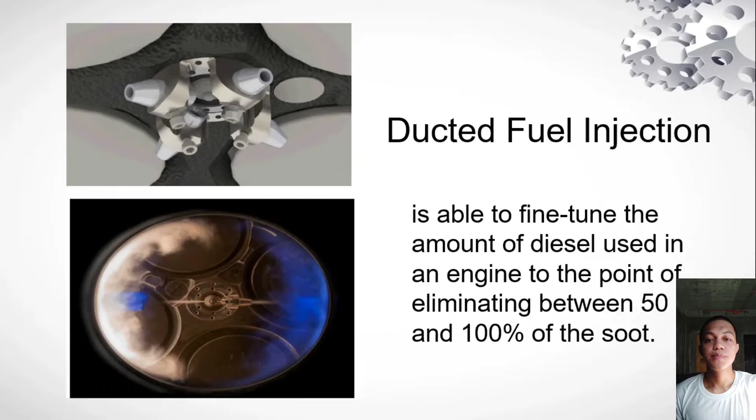It is much cleaner when it passes through these ducts. They came up with this idea because of the Bunsen burner. As we can see, it has a cleaner flame when it has ducts.

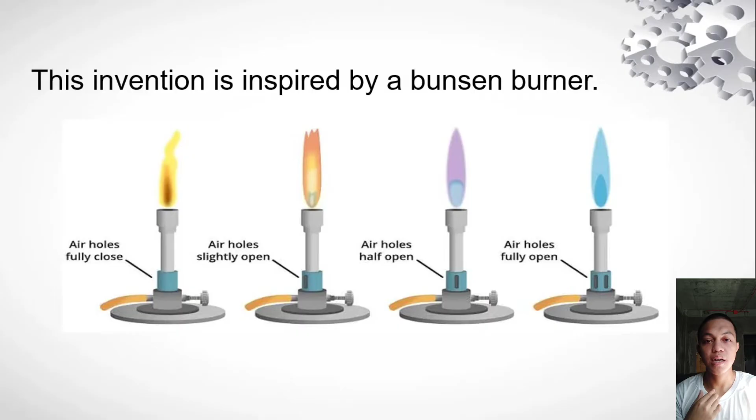These ducts are shaped in a way that the fuel is pumped into them and the air is pulled in from the back of the ducts. The fuel and air mix more thoroughly to get a better air to fuel ratio, and the aftermath is much cleaner.

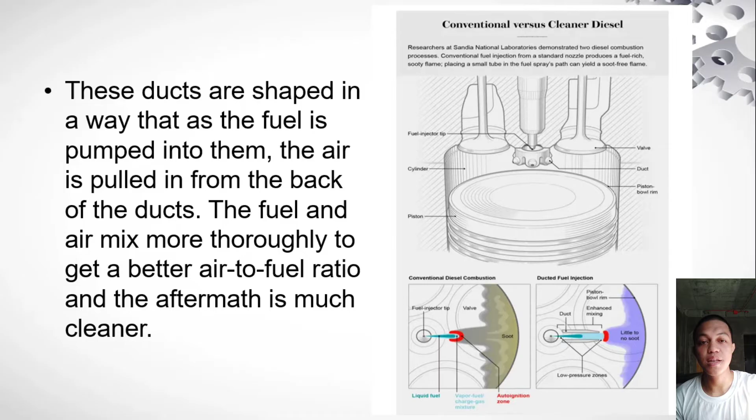So a more cleaner byproduct. We can see from the picture that the right side shows much cleaner combustion by ducting the fuel injector than the left side, which doesn't have a duct. That's all, sir.

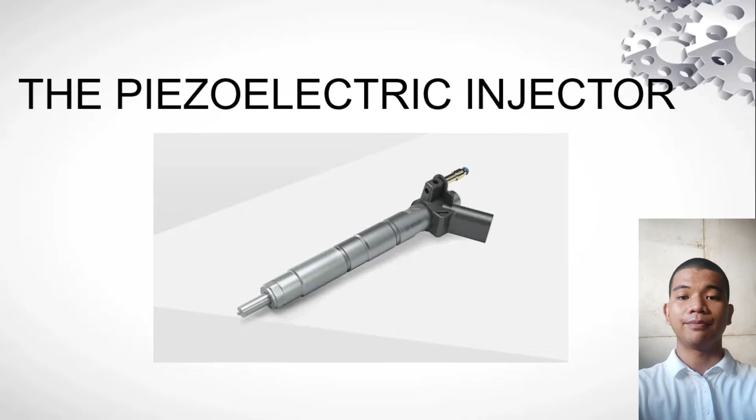It is a type of injector that is an advancement in a common rail direct fuel injection system in diesel engines that employs the inverse piezoelectric effect, where in simple terms, the presence of an electrical voltage at the end faces of a piezoelectric material can cause it to expand or contract. That is why it uses the piezoelectric effect, particularly the inverse of that effect.

For clarification, the piezoelectric effect is when a piezoelectric material experiences mechanical stress, it produces an electrical charge. Due to its rapid expansion and contraction, it is used to very quickly and very accurately fire fuel injectors. That is why it is an improvement in common rail direct fuel injection.

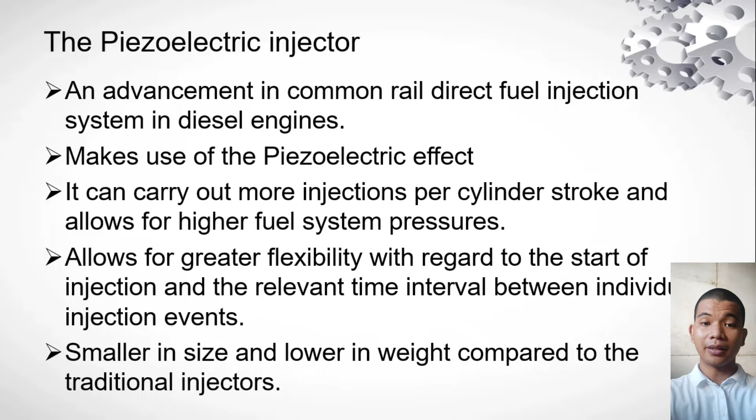In one of the articles I have researched, it is said that the expansion can be precisely repeated much better than using electromagnetic solenoid style injectors. The use of this style of injector in diesel engines has allowed engineers to improve power output, fuel economy, and emission levels while reducing noise levels.

The injector is made up of 4 primary sections. First is the piezoelectric actuator, next is the hydraulic coupler, next is the control valve, and lastly the injector nozzle. At the top portion of the injector is where the piezoelectric actuator is located.

It is composed of a piezoelectric stack, a pushing pin, and electrode wires. The piezoelectric stack expands or contracts as the electrode wires give an electric charge. A hydraulic coupler or amplifier increases or amplifies the stroke created by the piezoelectric actuator.

The control valve directs and controls fuel flow, which hydraulically opens and closes the injector nozzle. Lastly, the injector nozzle generates a fine mist of atomized fuel directly into the combustion chamber. So I think that is the composition and the operation of the piezoelectric diesel fuel injector. That is all. Thank you.

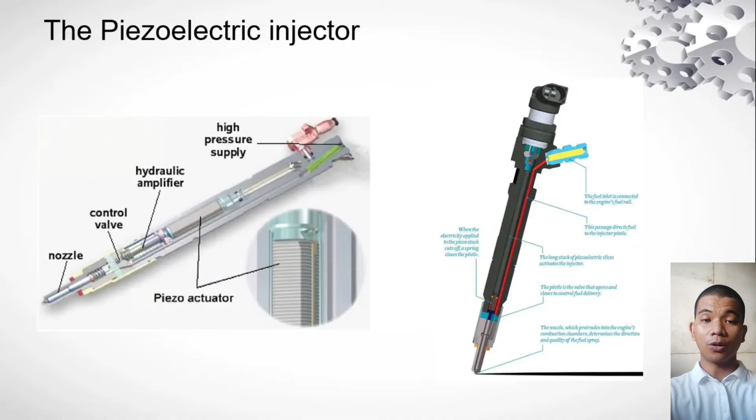The MAN B&W ME-LGIM is a two-stroke dual fuel engine that can run on methanol as well as conventional fuels. The engine provides an efficient, proven and reliable solution and plays an important role in decarbonization of the maritime industry.

Simple handling, storage and bunkering of methanol, combined with a relatively simple auxiliary system and the potential to be carbon neutral, makes it an attractive option for meeting decarbonization targets. It is a proven two-stroke methanol engine design available for newly builds or for upgrading existing conventional fuel vessels.

The engine represents a proven and refined engine design based on more than 120,000 running hours on methanol alone. When fueled by methanol, the MAN B&W ME-LGIM engine significantly reduces greenhouse gas emissions, particles, and SOx emissions.

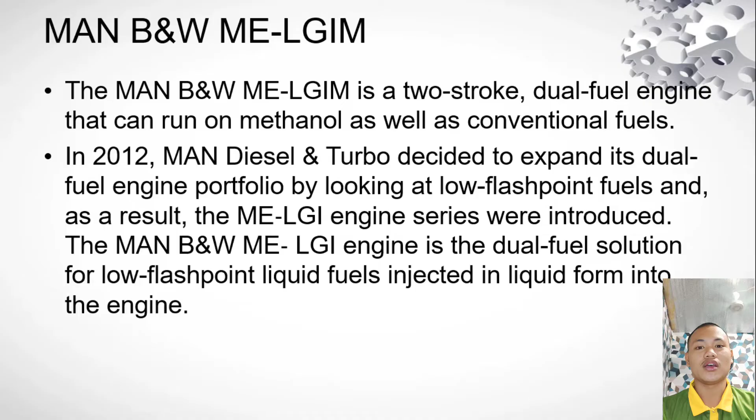Methanol produced from renewable sources can provide carbon neutral propulsion. The MAN B&W ME-LGIM provides up to 100% carbon neutral propulsion when fueled by green methanol.

Like all MAN B&W LGI engines, the LGIM engine is based on the diesel combustion principle. Utilizing the diesel principle ensures the methanol burning engine has the same power output and efficiency as the ME-C fuel oil burning engine.

In addition, the benefits apply in both methanol or dual fuel mode and diesel oil or compliant fuel only mode operating modes. The engine power output is not affected by ambient conditions, and it is only slightly sensitive to the quality of methanol, which is currently benchmarked to IMPCA, the International Methanol Producers and Consumers Association.

The functionalities of the ME-LGIM concept include the unit injectors, the so-called LGI fuel booster injection valves, for injection of methanol or FBIV into the combustion chamber around top dead center.

Next is the hydraulic control system to control the LGI fuel booster valve operation. Then there's the sealing oil supply unit mounted on the engine to ensure that no methanol leakage occurs in the moving parts of the methanol injection system.

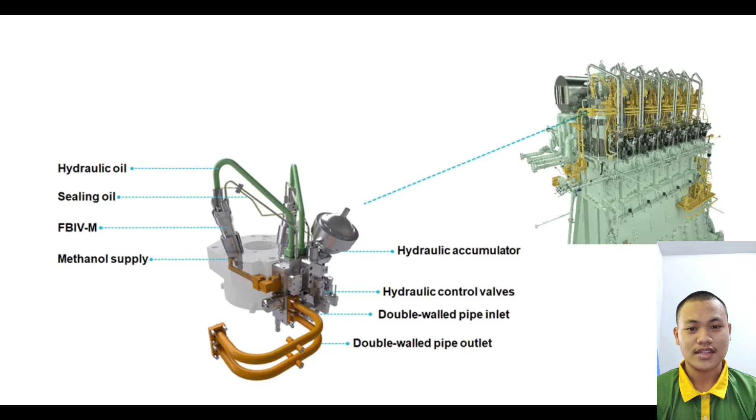That's all, sir. So the advancement of today's diesel compared to before — honestly I don't have real knowledge of that, because I don't have experience to say what exactly has advanced. So my approach, aside from searching the internet, is that when you search there's so much information, it's tiring to read, and you still don't know if it's accurate. To be honest, I don't really understand it well because I don't have deep knowledge of the shipping industry.

So instead I asked people who had experience in the shipping industry. I tried asking my uncle regarding this advancement.

My uncle said it's not going to be very exact or detailed, just an idea. He said he is one of the trainees selected for a vessel fueled by LNG. Compared to before, when ships were fueled by diesel, now it is fueled by LNG, liquefied natural gas.

I chose the Caterpillar C32B 2025 marine diesel engine. The CAT C32 engine lineup has a long-standing history of excellence among sport fishing enthusiasts.

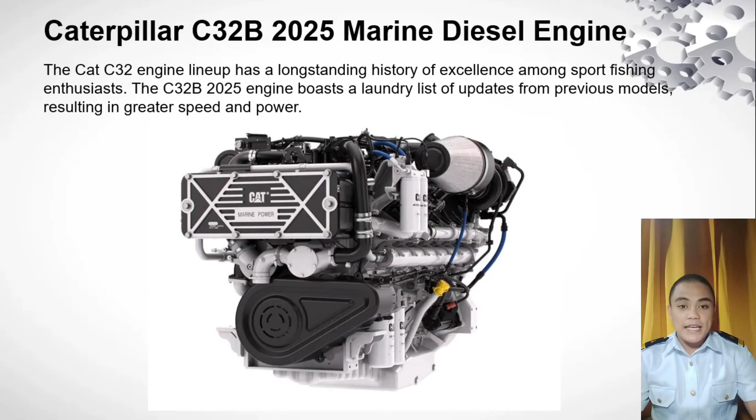The C32B 2025 engine boasts a laundry list of updates from previous models, resulting in greater speed and power. The new C32B delivers a 5% power increase over the previous model with just a 2% weight increase. The C32B 2025 engine weighs in at 6,780 pounds dry, just slightly heavier by 2% than older models in the lineup, while ensuring 5% more power. It's more muscle without more bulk, making it a great choice for repowers.

Compared to previous engines in the C32 series, this model offers a 25% noise reduction with an advanced unit injection system when operating at low speed. A day fishing shouldn't feel like a night at a rock concert. With the new C32B, you can hold a conversation on deck at normal volume even when running at full throttle. Our new 2025 marine horsepower engine is 25% quieter under low speed conditions thanks to its advanced unit injection fuel system, similar to a common rail fuel system.

This system fires multiple injections of fuel per power stroke to reduce noise. This tried and true technology is incredibly reliable and easy to service. The size and shape of the engine has changed so little that a drop-in replacement is possible when repowering and replacing an older C32 model.